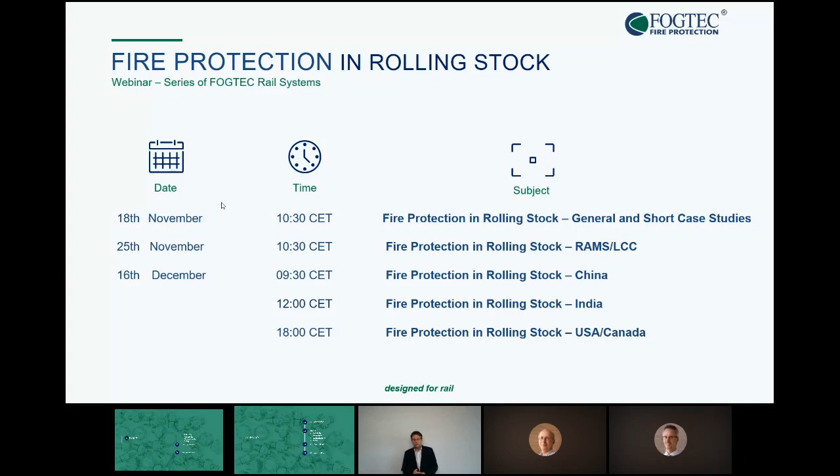First, about our schedule in general. Last week, as already mentioned, we did a presentation about general information and short case studies in fire protection in rolling stock, where our colleagues René and Claudio gave the introduction and presentation. Today we are with Jonathan and Gael for the topics of RAMS and LCC, and in 3 weeks we will give a special session at 3 different times during the day, covering different regions of the world where fire protection in rolling stock is an important topic.

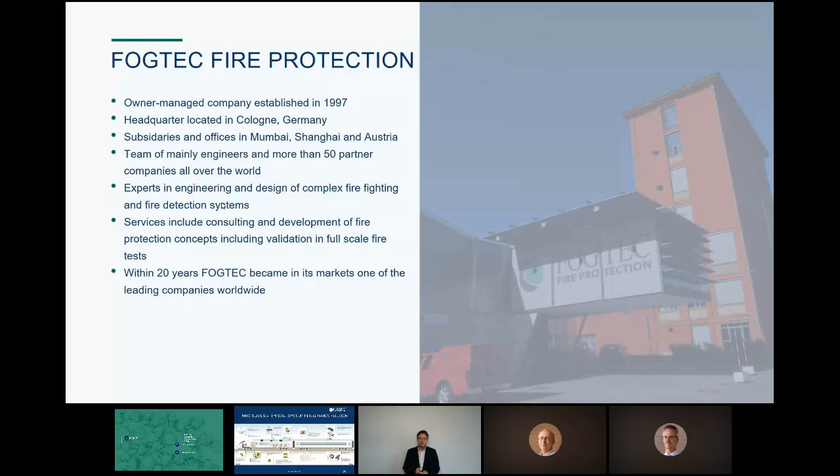A few words about FOGTEC, which is an owner-managed company established in 1997. The headquarters is located in Cologne. We have subsidiaries and offices in Mumbai, Shanghai, and Austria. With a team of mainly engineers and more than 50 partners worldwide, we cover the business and support for fire protection solutions, and especially today, fire protection in rolling stock all over the world in a global approach. They are mainly experts in engineering and design of complex firefighting and fire detection solutions to meet the requirements of our customers. The service includes consulting and development of specific protection solutions, which are validated in full-scale fire tests. Within the last 20 years, FOGTEC became one of the worldwide market leaders in its market.

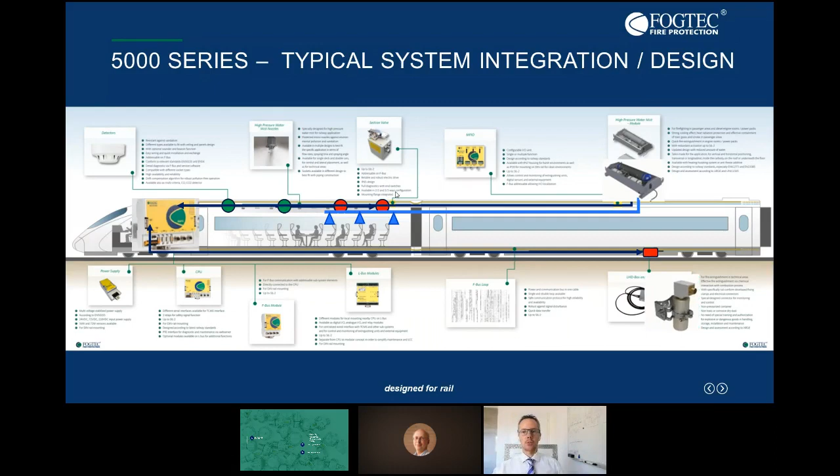So this was just some basics about how the system is working. Now we will step inside the RAMS details, and I will speak a bit about reliability.

Reliability starts at the early design phase. First of all, we need to know the mission profile, what kind of application the system will be used for. Then, according to this, we have to define the failure rates of the different components.

For electric or electronic components, it can be based on inherent failure rates, whereas for mechanical parts, usually it is a quantitative analysis of field data if available.

You probably already know this bathtub curve, where at the beginning, in the commissioning phase, you're debugging the system and the failure rates decrease. Then over the normal operation lifetime, we have an almost constant failure rate. And at the end of life of the product, due to usage over the years, the failure rates increase again.

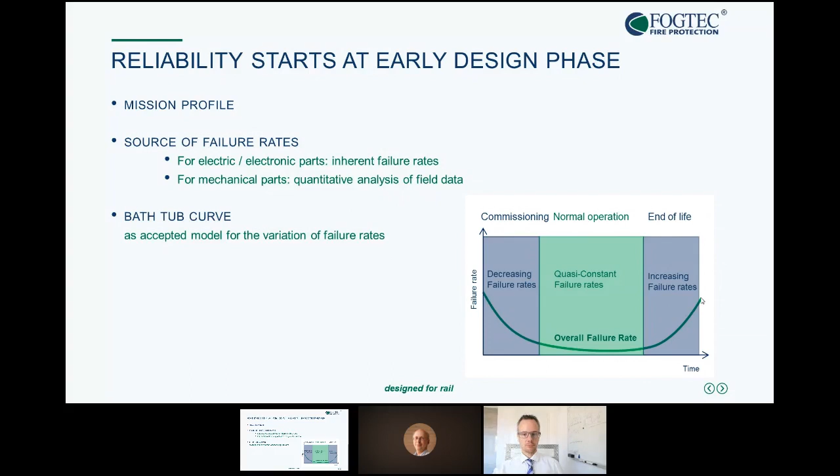Then in the second step, the reliability is based on analytical calculation like FMECA, using the MTBF values of the single components. After that, we go into a testability analysis.

Here on the right is an example from a previous system we did some years ago, where you see the sum of all failure rates at 100%, and at the end, the sum of T2 rated failure rates. T2 rated means it leads to a stop of the vehicle from the mission or a delay of more than 5 minutes. So only 2% of the overall faults may lead to a T2 failure.

In the same way, we also use the testability analysis to define which kinds of failures are detectable through maintenance, preventive or corrective, or directly by the system itself. In this application case, we are able to detect 98% of all possible failures on the system.

In the next step, a fault tree analysis, so-called FTA, can be done, defining the undesired event and the functional block diagram, as you can see here. Each block is defined with its failure rates, and then the tree is built to define the overall risk of having a failure.

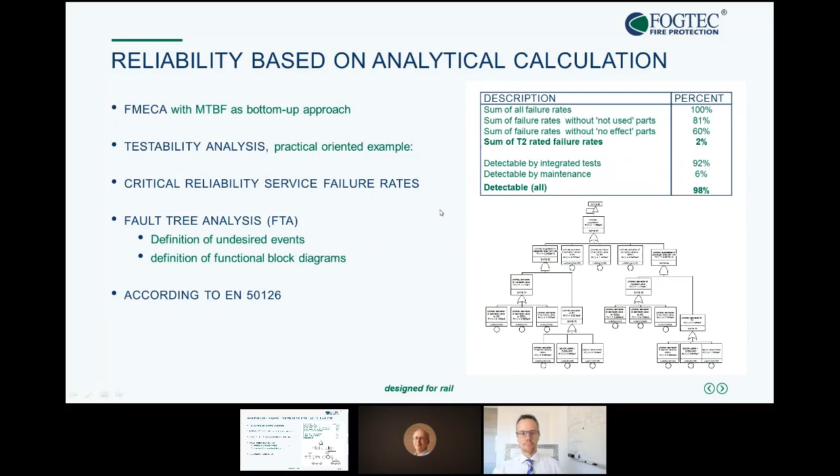The reliability assessment is done at two levels. First, at component level, as mentioned before, we need to choose the material in the right way, knowing their failure mode and related failure rates, to be sure we can meet the reliability target expected by the customer.

In parallel, we also have to validate all single components for the requested conditions, in particular for railway applications. In Europe, we use EN 50155 for all types of shock, vibration, climatic conditions, voltage, and so on. These are, of course, stronger conditions than we may have, for example, for building technology.

In a second step, we go into the system level. System level needs, first of all, to validate the project processes. For example, who is allowed to write a document, who is allowed to review it, who is allowed to approve it, to make sure we have at least a 4 to 6 eyes principle applicable.

In the second step, we go inside the software assessment, like SIL2 assessment, which we will speak about later on, according to EN 50657. And at the end, we reach the complete system assessment, which is finally the only document the customer receives, but there are a lot of steps behind it and lots of documentation to be produced in advance, which we will also speak about later in this webinar.

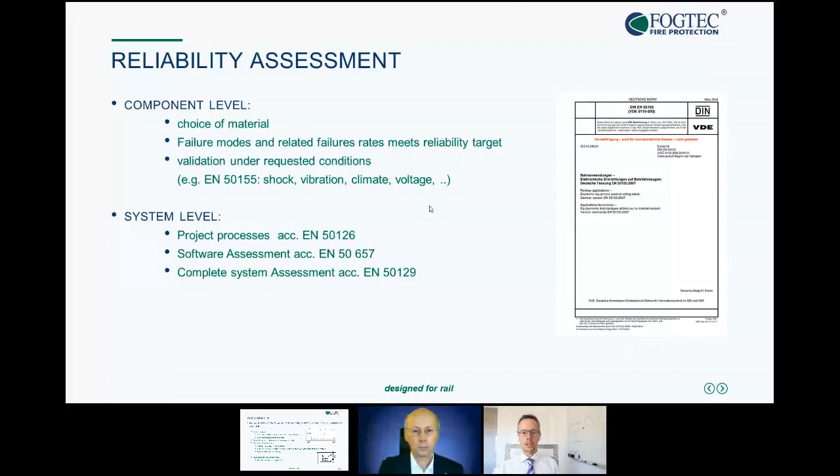The first part I would like to talk about is the next in the line of RAMS, which is the letter A, availability. So what do we understand by availability? Simply said, will the fire protection system be working and be available when I need it, that is when the train is in service. This depends on the reliability, as Gael has just explained, and also the design of the system, and whether or not failures can be detected to avoid unscheduled downtime.

System design is very important, and as we already said, selecting reliable components for the railway environment is important. That's why we do the testing of all the components on shock, vibration, and so on. But one of the main issues on availability is to try and avoid or eliminate single points of failure. These are failures which will cause the system to be unavailable. By avoiding these, we can say even though a failure occurs, the system is still available.

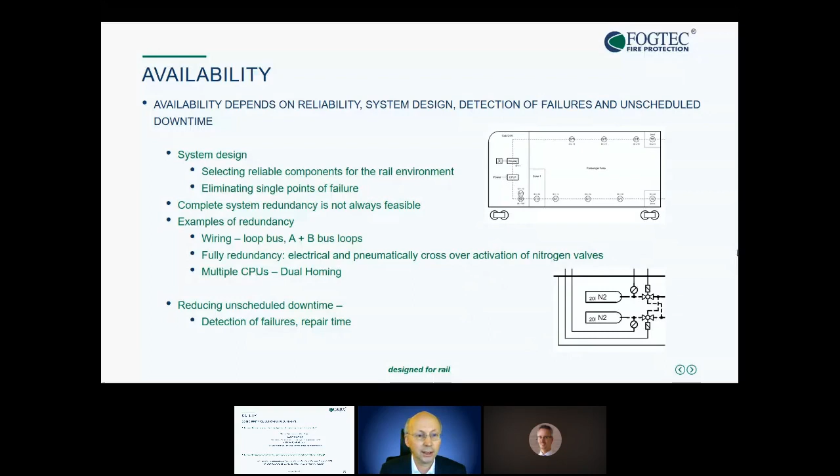Maintainability is basically the ease of how easy it is to maintain a system. So what we will look into is which parts of the system have to be maintained on a fire protection system. There are different levels of maintenance: preventive maintenance, predictive maintenance, corrective maintenance. We will look into how we can combine these to minimize the costs of maintenance.

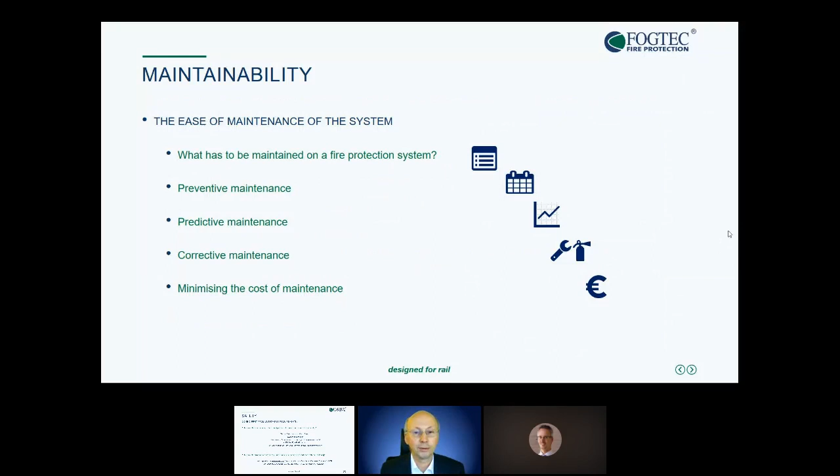Going back to that illustration that Gael showed, which parts of a system need to be maintained? We have different components. We have the electrical components, which can have a certain amount of self-monitoring. We have the mechanical components, such as the pipes and the nozzles. The pipes are dry, the nozzles are passive elements, there are no moving parts, so this part of the system is almost maintenance-free. Then we have the electromechanical parts, the valve, which will open or direct the water to the right location to suppress a fire. This has both electrical and mechanical parts, so we'll show how these can be monitored as well.

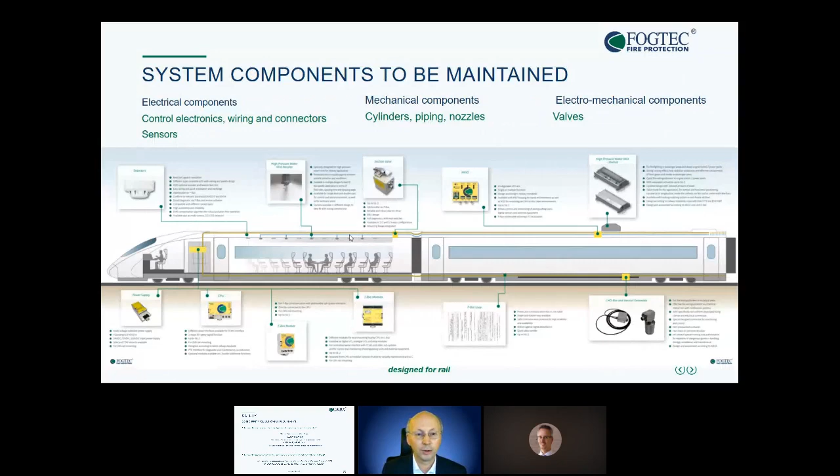So the first stage is preventive maintenance. This is a matter of repairing or replacing a part before a fault occurs. This requires a frequency or periodic inspection and testing to see the status of the equipment, or to replace a part which has a certain lifetime.

Just an example of how we can affect this, we have an illustration of one of the components of a fire suppression system: a flexible hose. These can be made out of rubber, elastomer, or metal. Elastomer ones have a certain lifetime, which means in the lifetime of a train, which may be 30 or 40 years, they may have to be changed several times. Whereas a steel or metal flexible hose will last usually the lifetime of the vehicle.

Another way of reducing or extending the intervals for preventive maintenance is to have a lot of self-monitoring. So electronic components in our system will be monitored, the bus will be monitored, the components will be monitored, and they will be able to indicate a fault outside the normal working conditions.

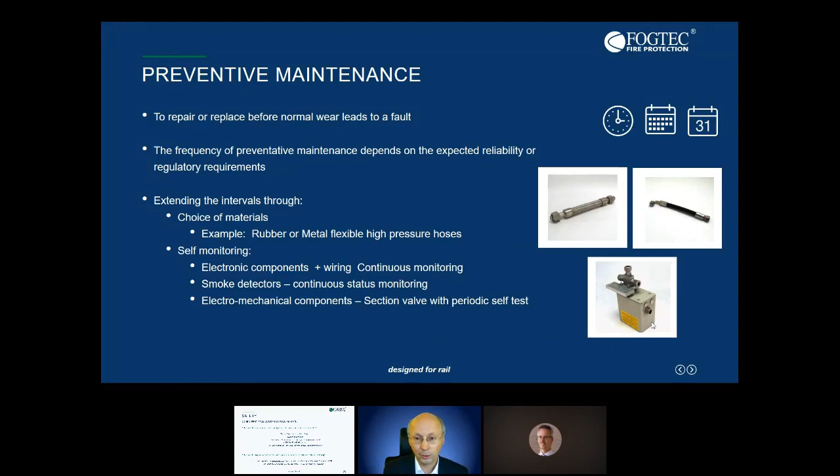As I said, the pipe work is empty normally in normal conditions, so this will not spray any water.

There are, of course, some functions which cannot be tested automatically, and these will have to be done in the periodic inspection. For example, smoke detectors - the electronics are self-monitoring, but the smoke chamber has to be tested usually once a year using a test spray, which will spray just to simulate and check that the smoke chamber is working correctly.

There are also other components which we cannot really define a fixed interval for, such as components which are accessible to the public. So depending on how the public reacts - is there any interference - there may be a visual inspection required more frequently or less frequently.

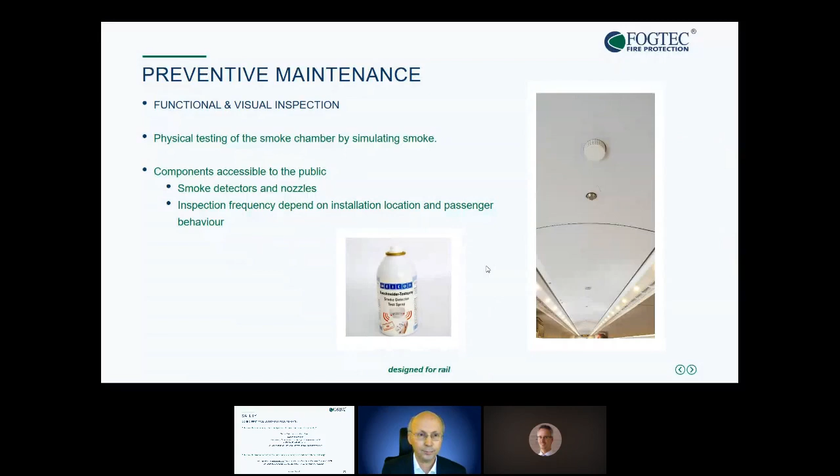Predictive maintenance is when we have continuous monitoring for a gradual change in condition. So if we have, for example, smoke detectors, they will be monitoring for smoke, but they are susceptible to dust in the atmosphere, which will also be measured. But a smoke detector can distinguish between a continuous build-up of contaminant, slow changes, and rapid change of smoke.

This slow change will first be compensated, but it can be communicated to the control unit, which can then monitor the rate of change. So it can predict when that contamination level will be so high that it will be necessary to clean or replace that smoke detector, thus avoiding an unscheduled maintenance requirement.

In the cylinders, the nitrogen cylinders are under pressure. We have pressure sensors, and it is possible to monitor this pressure continuously. So should, in the very rare case that there is a leak, this could be seen - how long it would be until the pressure would be too low to ensure correct suppression - and this predicted time would give out the information that this should be addressed.

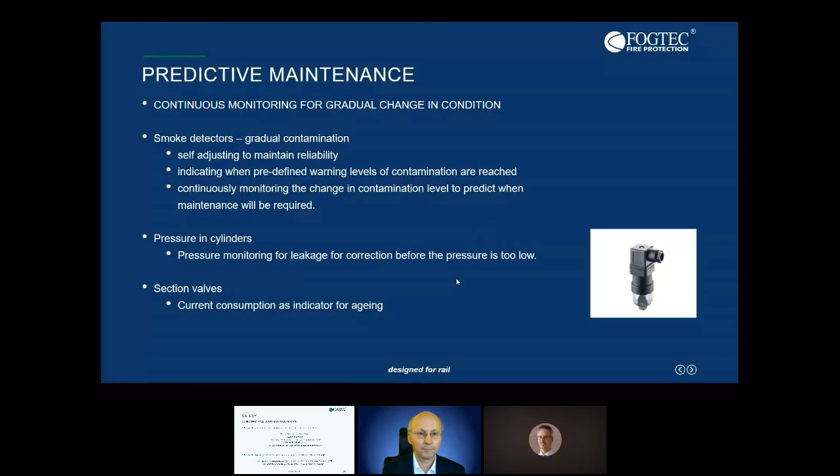There will be at some stage corrective maintenance required, either during normal maintenance cycles, that something has to be replaced or repaired. The idea of a good design is to make sure these components can be easily replaced quickly, so the downtime is as low as possible - using connectors instead of fixed wiring, using components which can be snapped into rail mountings quickly, or smoke detectors which fit into sockets as opposed to being fixed securely to maybe a ceiling.

There's also the event of, after a fire has occurred or a water system has been activated, needing to refill the water and nitrogen cylinders. Now, the quickest way of doing this is having it in a cylinder module, which can just be dismounted from the train - just one electrical connection, one hydraulic connection - and then a new module fitted. It takes a very short time, and the water and nitrogen cylinders can be refilled externally outside the service time of the train.

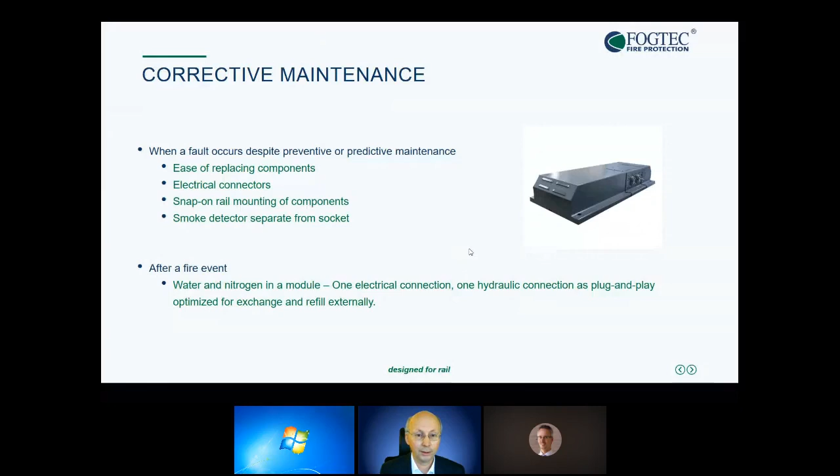So all these issues on maintainability, the idea of having a good system is to minimize the cost of maintenance. We do this through continuous monitoring and inspection, extending the periods if possible, using predictive maintenance, a good system that can indicate faults, have internal diagnostics, and a dedicated service tool which will help locate any faults and explain what needs to be done. The basis of maintaining any system is to keep it simple, with fewer parts, which will keep the maintainability cost down. And of course, the most important part is choosing components designed specifically for the railway industry. This is what a proper railway fire protection system is made out of. So that ends my part on maintainability.

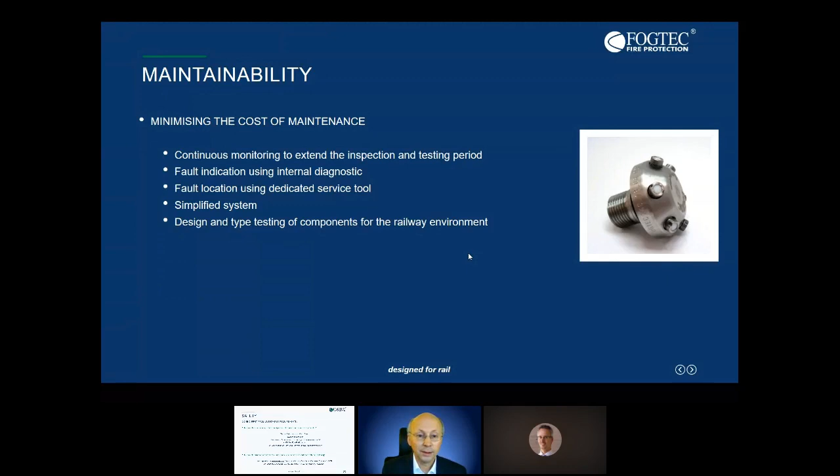Now I'd like to pass back to Gail, who will go on to the next stage in RAMS, which is safety.

Thank you, Jonathan, for the valuable contribution, and we will hear you again in some minutes.

Let's speak a bit about safety. First of all, of course, it's coming from customers' requirements.

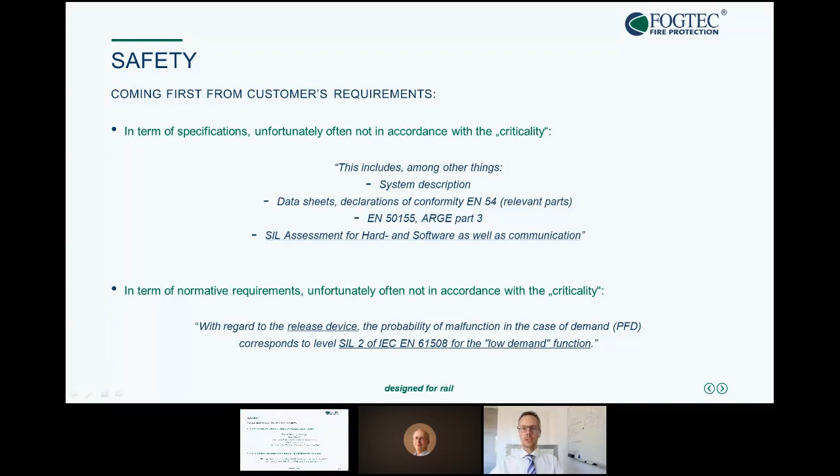We would like to point out that sometimes different requirement levels arise. This is an example from a customer specification asking for a SIL assessment for hardware, software, as well as communication. On the other hand, we have colleagues from Italy who probably know the Italian standard UNI 11565, which requests only, with regard to the release device, a safety level of SIL2. So we see discrepancies here—whether it applies to the release valve only, or to the complete system.

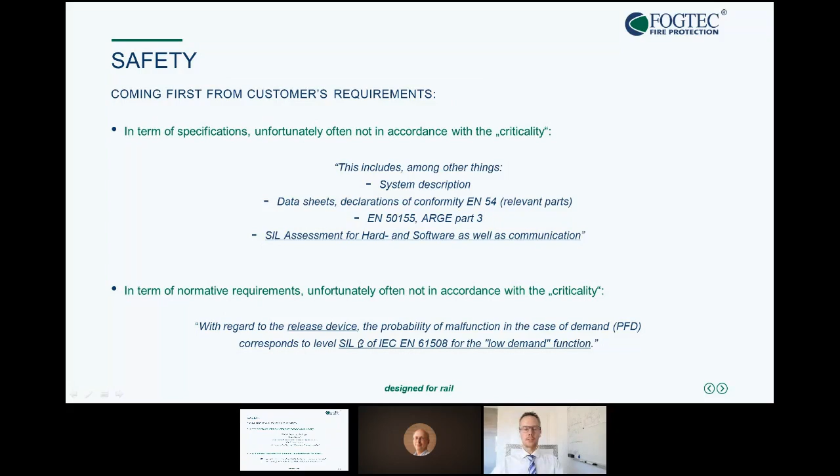What's the consequence of this? There are different requirement levels rising up, and sometimes disagreement or discussion between experts and homologation bodies, who need to merge together to achieve a global and common target, which could possibly mean the creation of a new standard, handing over all these topics to be merged into just one standard.

What's FOGTEC's approach on this? We decided to go the way of getting a fully certified SIL2 hardware and software system, the so-called Series 5000. For those who may not be so aware, SIL is a Safety Integrity Level, ranging between SIL 0 and SIL 4. With the FOGTEC solution, we reach SIL 2 for the complete system.

The Series 5000 is a really modular solution with high flexibility, supporting up to 500 participants on the bus, with full redundancy in communication. You can see on the picture the development timeline of this solution.

We started in 2012 with Basic Integrity, for a SIL 0 system, with the first application case starting from 2013. In parallel, we developed the SIL 2 solution, which needed much longer, becoming available between 2015 and 2016, with the complete SIL 2 assessment achieved by 2018. When we mention SIL 2 assessment, we will speak in the next slide about everything required to achieve this as a complete global system.

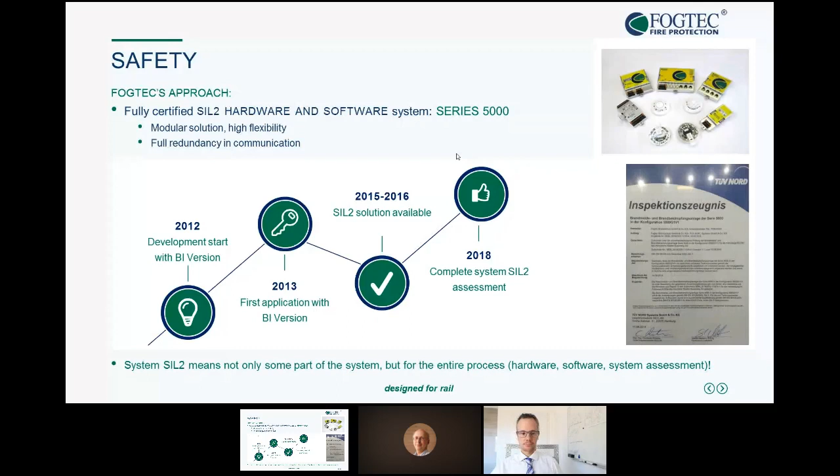We spoke before about what's required to achieve this target of complete system Safety Integrity Level 2. There is a huge amount of documentation and validation effort required. First, we validate each single component according to applicable norms and standards. Then we go into the software SIL 2 assessment according to EN 50657. You can see here on the right an example of all the documents we have to deliver to get the software assessment. Based on this, once hardware and software are validated, we can go into a complete system assessment according to EN 50129.

This is finally the sole document that the customer will receive—a unique paper saying, okay, the FOGTEC solution as proposed in this application case is validated according to SIL 2 for the complete system. But there is a lot of effort and documentation that needs to be provided in the background.

Like mentioned by Jonathan before, there is still the right balance to be found between full redundancy and cost-saving LCC. We have full redundancy in the activation of the water mist system, electrical and pneumatic. The balance is on one side, from a safety point of view, we would like to have as much redundancy as possible to make sure it is safe. On the other hand, we try to reduce the amount of components to reduce maintenance and overall LCC costs. So at the end, there is a right balance between redundancy and cost-saving LCC that needs to be found.

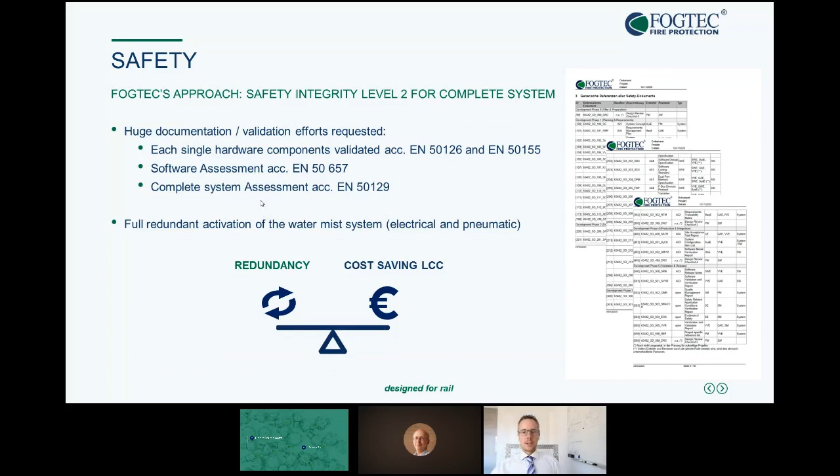At this stage, I will hand over to Jonathan again. He will explain a bit about lifecycle costs.

Thank you, Gail. On the point of life cycle costs, it's a question of what's it all going to cost. Over the life cycle of a rail vehicle, which is maybe 30 or 40 years, there will be ongoing costs. These are influenced by the system reliability, the availability, the maintainability, and the safety design, as Gail has just shown. It may be that a system which has been optimized for the purchase price alone may be significantly different in its design from one which takes into account RAMS and LCC.

I explained the example with a rubber hose, which may have to be changed several times during the life cycle of the vehicle, having an initially lower investment cost compared to a flexible metal hose. But over the lifetime, with less maintenance, not needing to replace them, it will in fact give a lower cost than the initial. There may be cases where, over the lifetime of a vehicle, the life cycle cost can in fact exceed the initial investment if it's not correctly addressed.

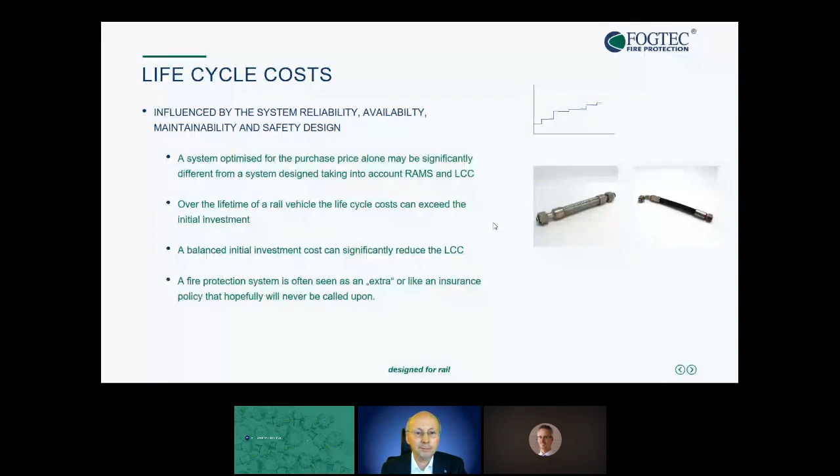If it's correctly addressed, it's always a balance between the initial investment cost and the expected life cycle costs. By having maybe a higher or better investment cost to start with, you can in fact reduce the life cycle costs over the whole period.

Now, because a fire protection system is often seen as an extra, a system that will hopefully never be called upon, the cost of such a system is very critically observed by the users. So our intent, our method, is always to optimize this, to look for ways to reduce the maintenance requirements and keep a safe balance between safety and availability, and this is what's done by a well-designed fire protection system.

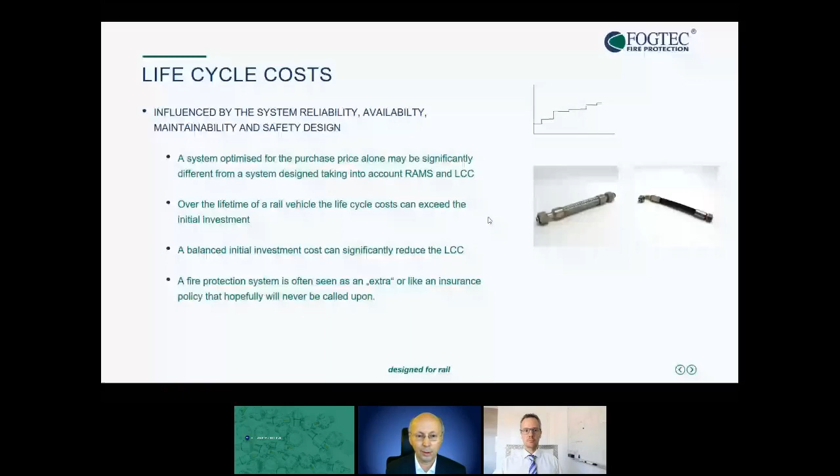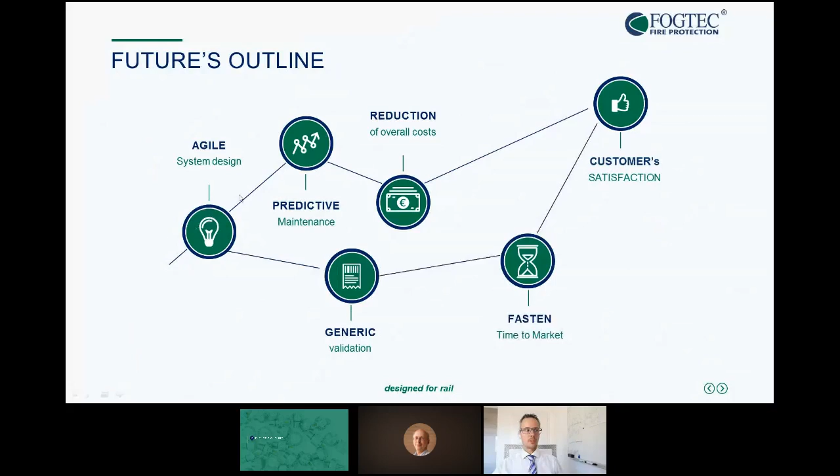Thank you. Yes, we want to finish soon this webinar with a future outline of how fire protection solutions could look in the near future, especially applied to RAMS and LCC. What is really important here is to start with an agile system design and software management. If we have the possibility to adapt at an early stage, from raw data to complete system, then it will be possible to have predictive maintenance and therefore reduce overall costs.

The overall cost reduction applies not only to the car manufacturer, but also to the operator, for better management of spare parts, making sure they are available at the right quantity, time and place. This leads, for sure, to customer satisfaction.